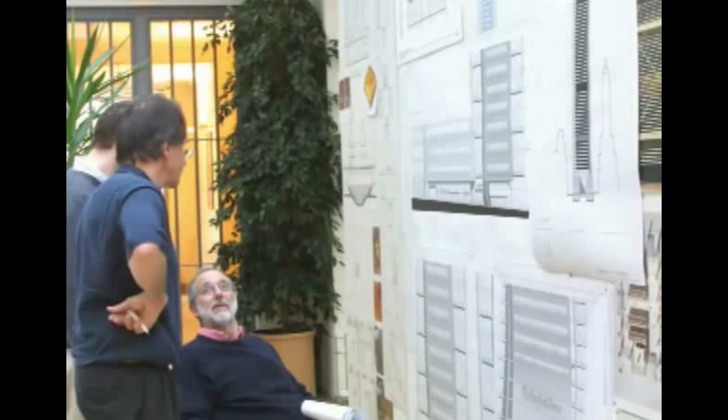Situated just east of the Hell's Kitchen area and west of Midtown Manhattan, the New York Times building towers over its surroundings. The first floor is open to the public, with the courtyard in the center that reflects the presence and relationship of Central Park to Manhattan.

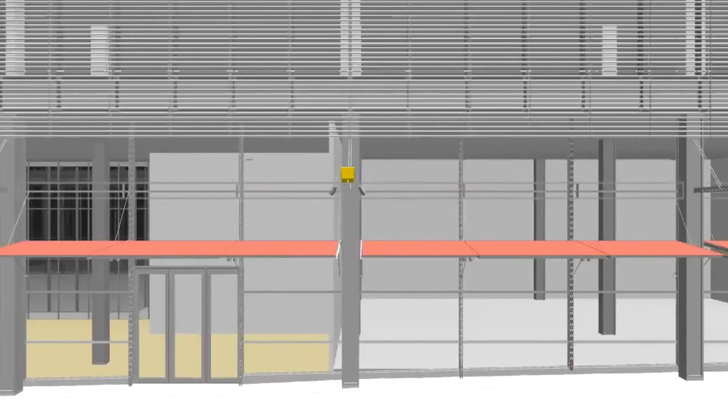As the floors go up, a screen of carefully patterned ceramic rods follows the open concept floors along the facade. 52 stories later, the rods dissipate at the top, with the tower culminating in a 300-foot steel needle that tapers into the sky. The building has served as the New York Times headquarters since 2007. So what makes this project so successful architecturally, structurally, financially, and in relation to the urban fabric?

We wanted a building that was a positive addition to the skyline. The primary reason that we picked a design architect, and Renzo Piano in particular, was because we needed those skills in order to accomplish our goals, if this building was going to reflect the values of the company and was going to enhance the way we work, and Renzo accomplished that in a magnificent fashion.

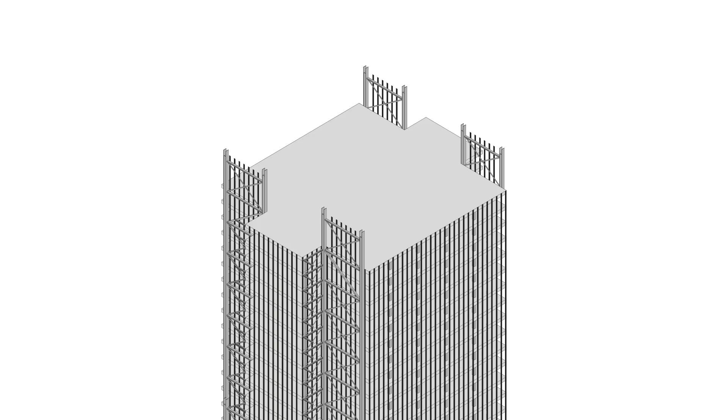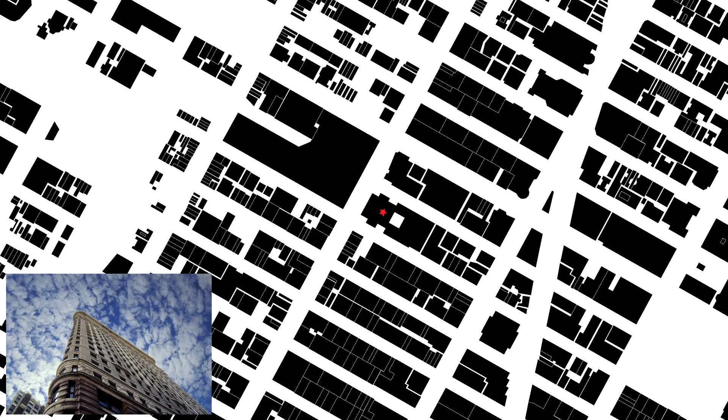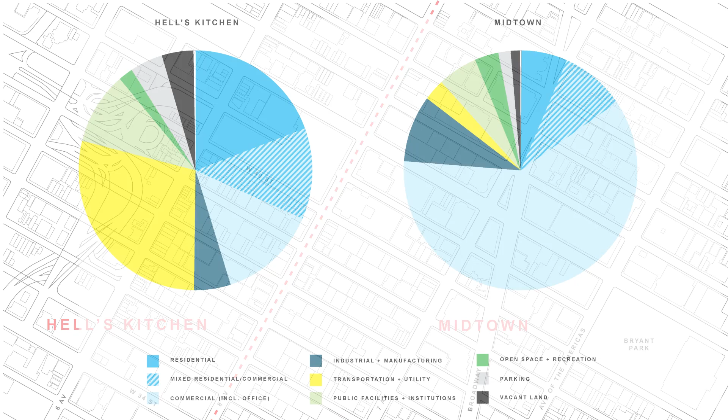The building is located on 8th Avenue between 40th and 41st Street at the border of Hell's Kitchen and Midtown. Midtown is known as the commercial and entertainment district of the city, including urban icons such as Times Square, Union Square, the Flatiron, and numerous famous theaters. Hell's Kitchen is the area that lies west of Midtown, up to the island's edge, and has been integrally linked with shipping and transportation. It also provides service to support Midtown's entertainment and commercial bias by providing infrastructure, residences, and industry.

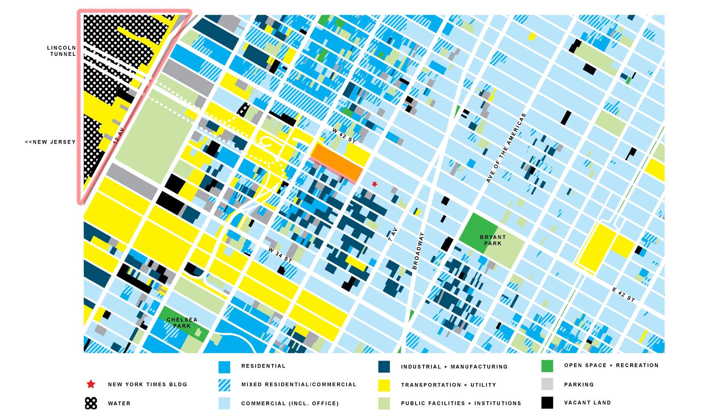Transportation is a major driving force, with the Lincoln Tunnel to New Jersey, the ACE subway line along 8th Avenue, the Hudson River ports, and the Port Authority Terminal, which is right across the street from the New York Times building. In the past, Hell's Kitchen's demographic was predominantly low-income factory and dock workers, and developed into a slum.

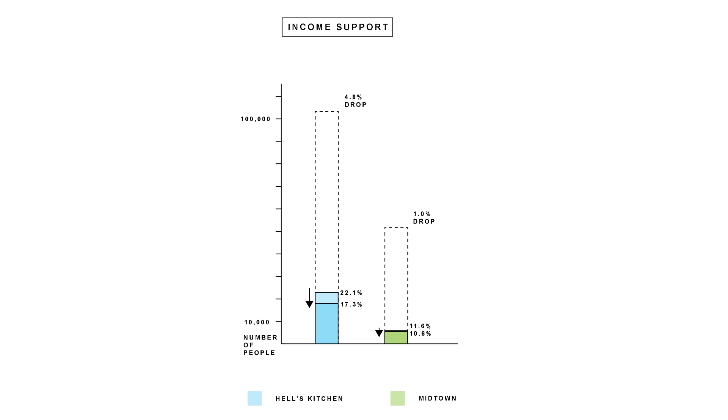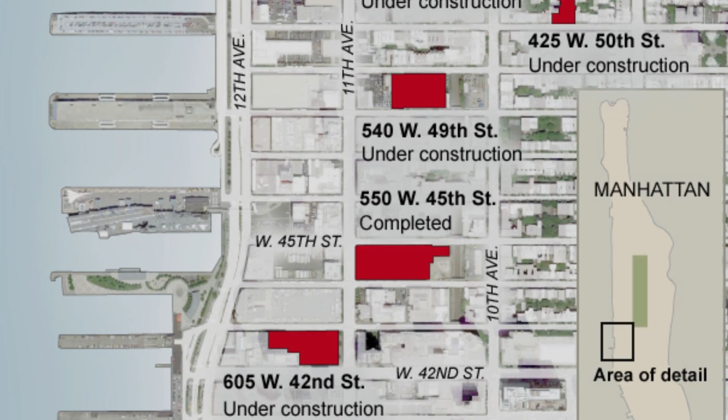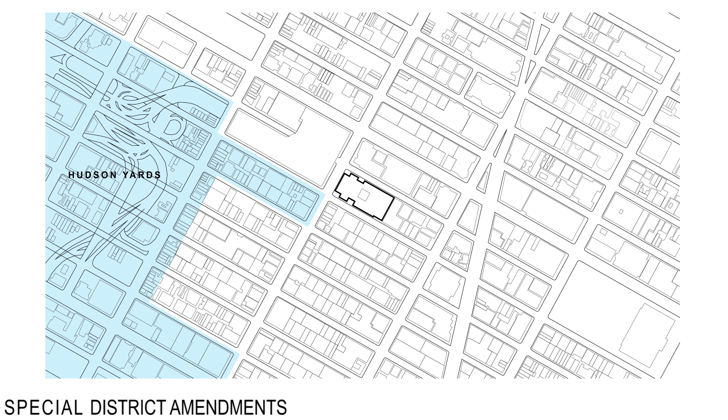The city's strategy for Hell's Kitchen's future is to increase the density and diversity of the area, providing more open public space, and to extend Midtown to the west. In the past decade, commercial and residential towers have sprung up, greatly increasing the population of the area. As one of the last neighborhoods to resist high-rise developments with buildings no more than 6 stories, many zoning amendments have been made which have lifted these restrictions. The recent residential towers erected in Hell's Kitchen are now some of the most expensive real estate in all of Manhattan, reaching upwards of $3,500 per square foot.

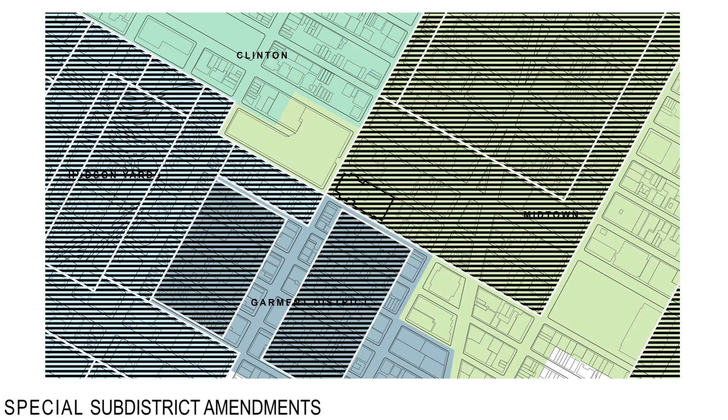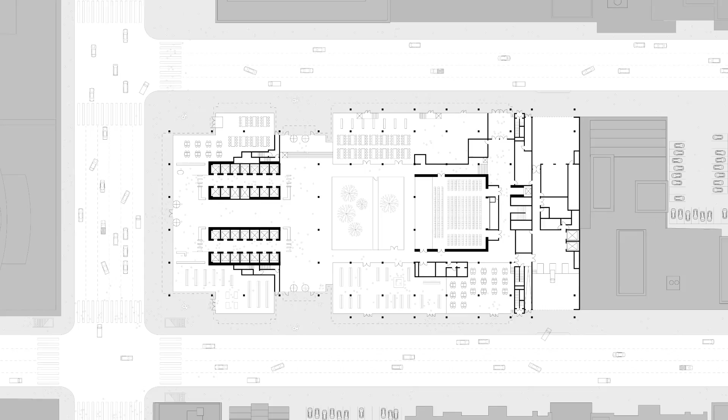This building actually flies above ground. It's fighting gravity. It doesn't touch ground. Of course it does touch the ground, but it doesn't take the space away from the street. You stand here and you see everything around you, and from around you everybody can see you here. It's a building that creates a sense of security by transparency and not by opacity, by giving and not by taking.

The building's podium is the main mechanism which achieves this openness and accessibility through the mediation of the tower and the public life of the street. Sitting lightly on ground, the structure is streamlined into minimal points of contact. At grade, the building is entirely open to the public and becomes part of the streetscape. There are access routes connecting all 3 adjacent streets, providing shelter and shortcuts which break up the city block into a permeable indoor space that encourages the flow of pedestrians, employees, light, and air.

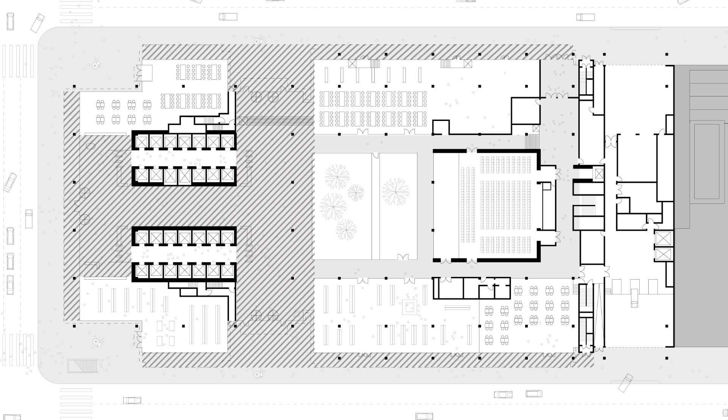For the tower, the layered building envelope acts as an environmental filter. At grade, it functions as a social mediator, allowing for the public and city to flow through one another, dissolving the separation between public and private. The ground floor program is accessible 24/7 and is occupied by retail spaces, restaurants, and a high-end supermarket which make up the perimeter. The interior courtyard creates a pristine plot of green space. Further in is an auditorium which is open for public use as well.

The tower, along with the vertical circulation core, is located on the western side of the site for the lowest possibility of congestion. The service areas, including loading docks and access to the cogenerator, are located at the east end of the building, the only side without direct street frontage.

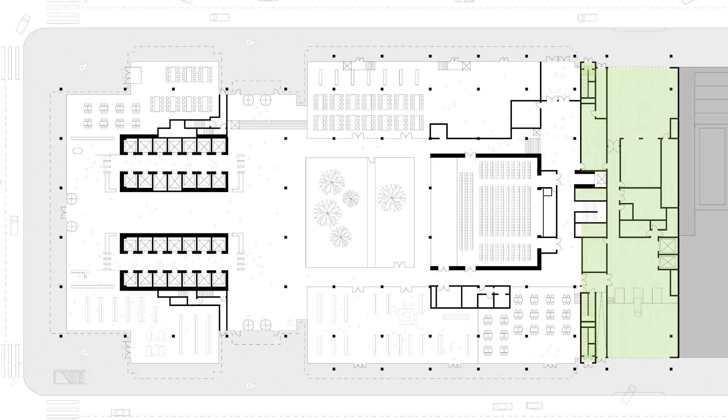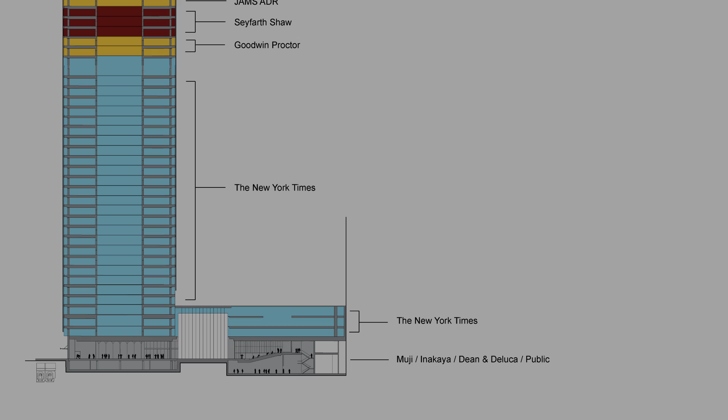A brand new building was the New York Times' chance to rebrand itself and its newspaper with a new image to maintain their reputation in the advent of the digital age. The rights to the site at 620 8th Avenue were leased to the New York Times Company and Forest City Ratner Management for $850 million over a 99-year contract. The first 28 floors are occupied by the New York Times, with the remaining floors being rented out to other smaller companies. This was a financial decision made to bring in extra revenue, as the upper floors can garner a higher price tag.

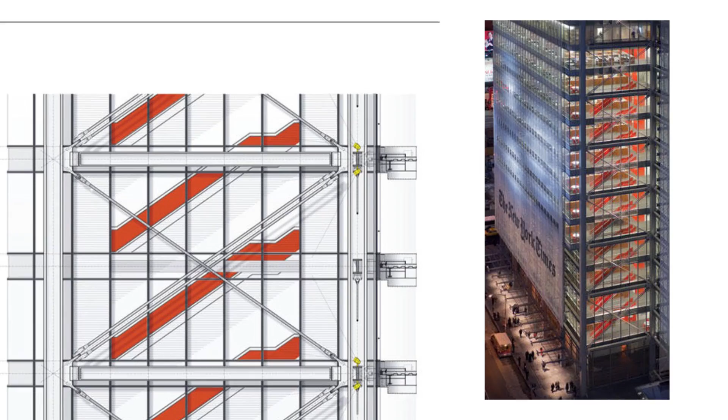On the interior, the building's office layout is a radical departure from the conventional office tower. In line with its design philosophy, it is extremely open concept and visually transparent. This open and versatile design allows the tower floors to adapt to any function and purpose, as was intended due to the spaces being rented to other occupants. The arrangement of the space is also extremely democratic, having little trace of standard corporate hierarchy. There are no corner offices, and instead the corners are occupied by circulation staircases, a space that is shared by everyone equally.

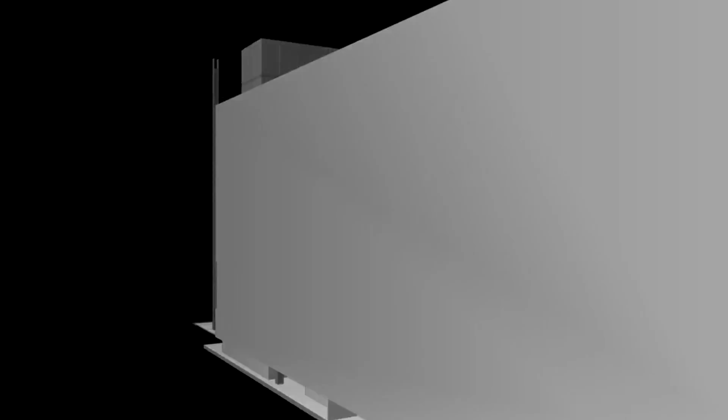Additionally, the Pulitzer Prize-winning journalism, writing, editing, and research that the New York Times is known for happens between the second and fourth floors in the plinth, the newsrooms. These are the closest to the street level, allowing pedestrians to see right through the office space to reinforce the idea of truth and total transparency to the public.

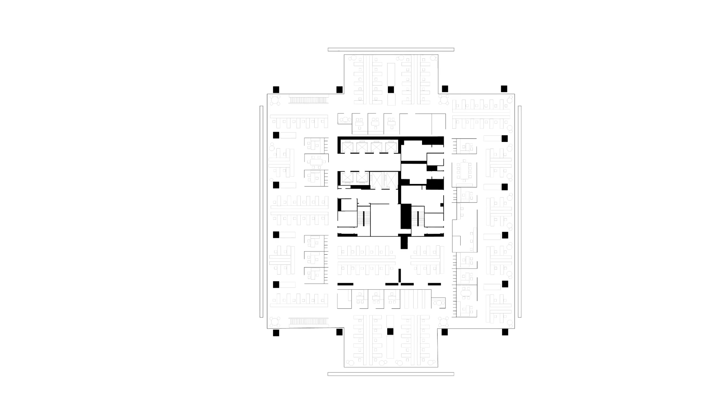These floors are also physically the most sensible for the type of work that goes on in the company, as communication and information transfer operate much better on fewer, large open floors that encourage movement, rather than many vertically fragmented sections, which are naturally more restricting.

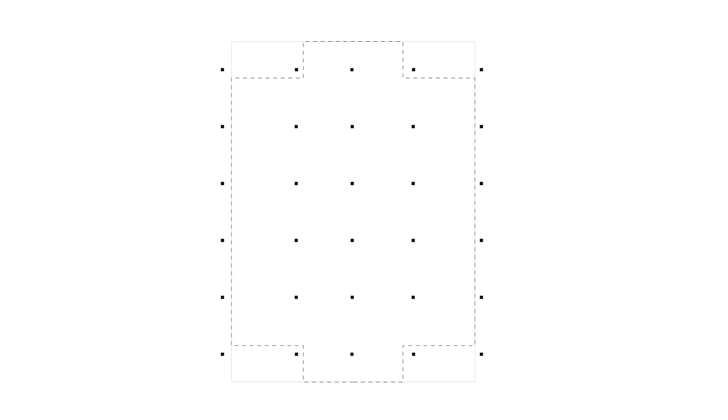The crucifix shape of the tower is caused by the corner cutaways in an otherwise rectangular block of the building. In a dense urban grid like Manhattan, where space is extremely valuable, squandering any potential square footage is close to throwing money down the drain. However, this cutaway is only an illusion. The footprint of the building is carried straight through the columns, with cantilevered bays extending on the north and south facades. Floor area is not wasted, but in fact added.

This partial extension creates the look of a corner that has been carved out, opening up the solid form box of a conventional skyscraper into a shape that resembles an exploded system of layers. This intermediacy of layers is present throughout the building, blurring the line between what is inside and what is outside. Even the space we are in this moment, this cafeteria is about a sense of lightness and belonging. You know, the building belongs to the city, and the city belongs to the building.

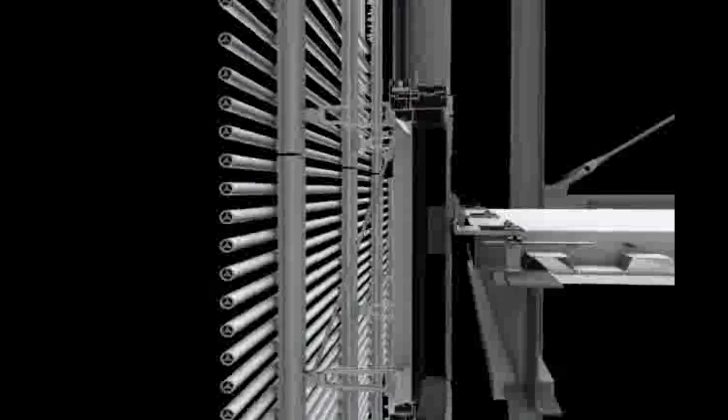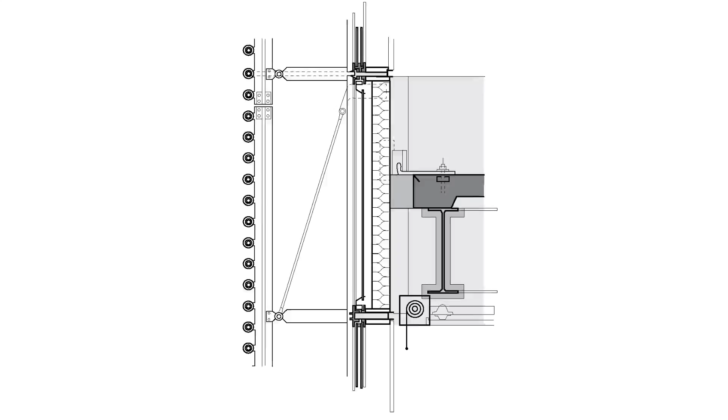The most visually striking feature that one notices about the building is its intricate ceramic rod screen facade. 185,000 rods of 5-foot-long ceramic are bolted 18 inches away from the curtain glass walls on all four faces. They hang off on the side edges past the curtain wall and fly way above the building's roof into the sky. The rods are mounted in a rolling pattern of placement distance and repeats all the way up the building, giving a visual moiré effect.

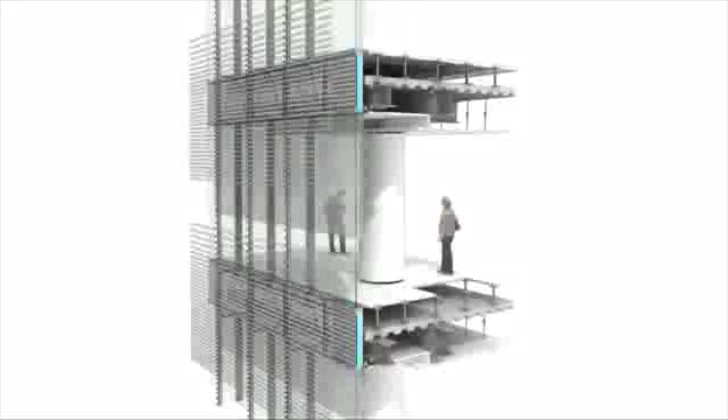The only breaks in the screen occur at the eye level of the building's occupants to create an unobstructed view to the New York cityscape. The rods also serve to provide shading, preventing solar heat gain by reflecting sunlight. Visually, Piano designed the facade to give the sense of lightness and weightlessness. This new design, unlike the Times' previous masonry buildings, expresses the ideals of newspaper journalism: transparency, independence, the free flow of information, moral clarity, and the objective truth.

This unique facade has also had some unintended side effects as well, as the rods essentially turned the building into a giant ladder. In 2008, Alain Robert, also known as the French Spider-Man, illegally scaled the New York Times building to protest the lack of action on climate change. With the building being the high-profile headquarters of a national news outlet, combined with its ease of climbing, its placement in one of the largest cities in the world, and its sheer size, these made it the perfectly ironic soapbox and social platform to attract media attention and notoriety. A total of 7 people have been arrested for trying to climb the building.

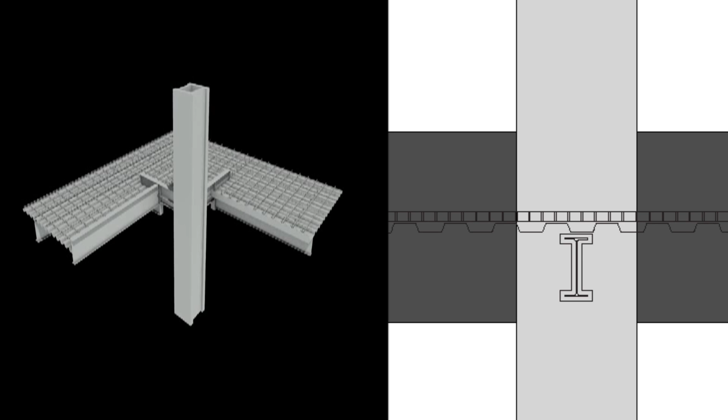The main component in holding the building up is a steel frame, created by 30-inch thick box columns composed of 6-inch thick steel plates welded together. From these columns branch wide-flange I-beam girders that run horizontally. A 3-inch thick metal deck is then laid across the beams to serve as a base for the poured concrete. A 2-inch tall mesh steel webbing is placed across the deck pan to reinforce the concrete in thermal expansion and compression. The concrete is then poured into the pan, resulting in a hard surface for rod supports to create a plenum beneath the floor. This is where the ventilation system, electricity wiring, and data support cables run through.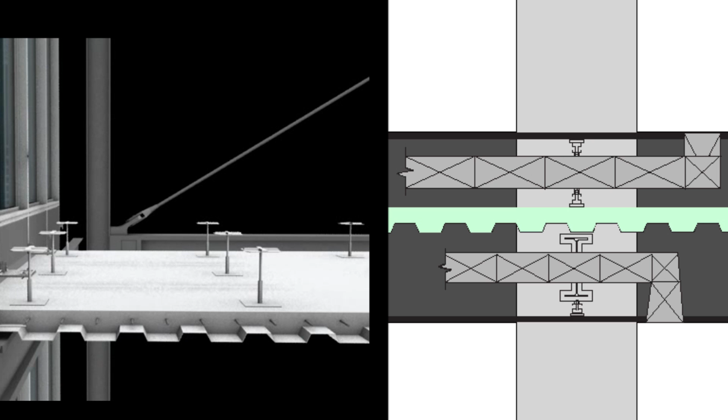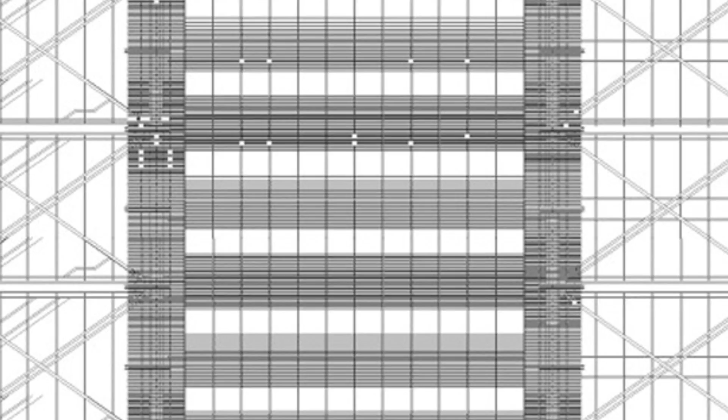On the underside of this, the I-beam girders create a drop ceiling for the floor below, where the intake ventilation as well as the lighting wiring exists. This double-spaced floor system repeats on each floor, creating a reciprocal relationship from floor to ceiling on each of the 52 stories. Each floor is monitored and controlled individually for maximum energy efficiency and the comfort of the occupants.

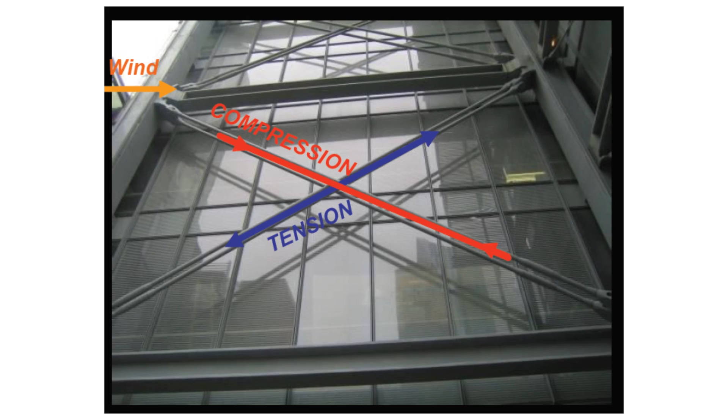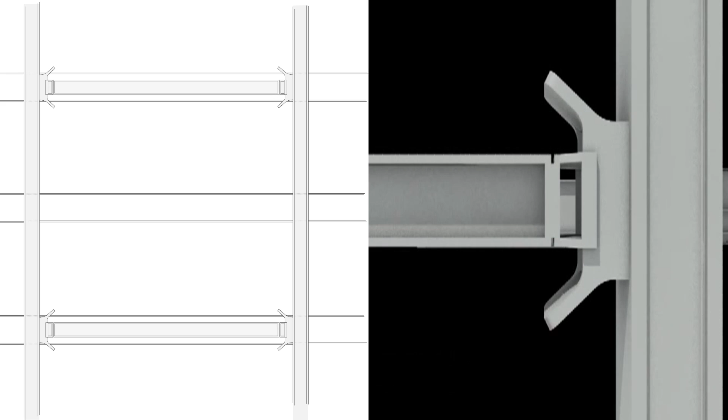While the internal core supports the sheer weight of the structure, the external support system on the exterior braces the building laterally. The exterior steel box columns branch off with horizontal beams connecting the building to the core. Using aesthetically pleasing knuckle braces, this is then reinforced on the exterior with X braces of 4-inch diameter pre-stressed steel rods that stretch between the columns and beams, taking the force of wind loads and vibrations causing the lateral movement.

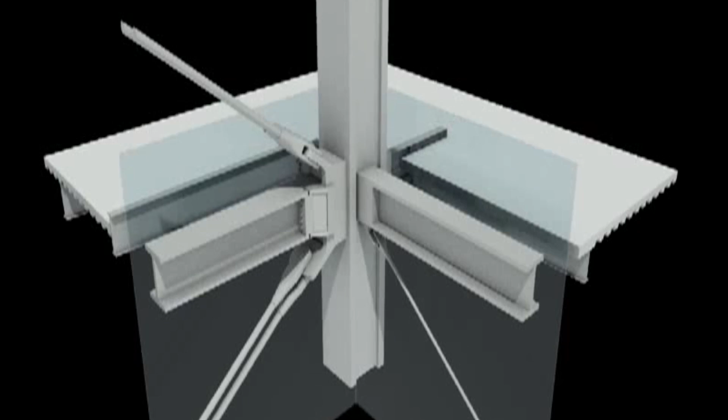This tandem dual structure system presents a heat transfer issue as beams connect columns from the interior to the exterior. To prevent thermal bridging, the steel connections at the cross bracing are heavily insulated to maintain thermal control. On each facade of the building are radiometers, which meter the amount of sunlight hitting each facade. Depending on the strength of the light, the shades will automatically lower or retract to maintain a comfortable amount of natural light and solar gain for each floor without manual intervention.

The innovation in the design and craft of the building is a testament to the successful connection between the New York Times and the streets of Hell's Kitchen and Midtown. The decisions and executions made in its siting, facade, layout, structure, and mechanical systems create open and inviting environments. A definitive landmark in the New York skyline and a feat of structural engineering, the New York Times building serves the public as well as its own employees by providing public spaces and bright open offices. Like the company it represents, the building successfully communicates its responsibility of public service and exists for the benefit of the world around it.